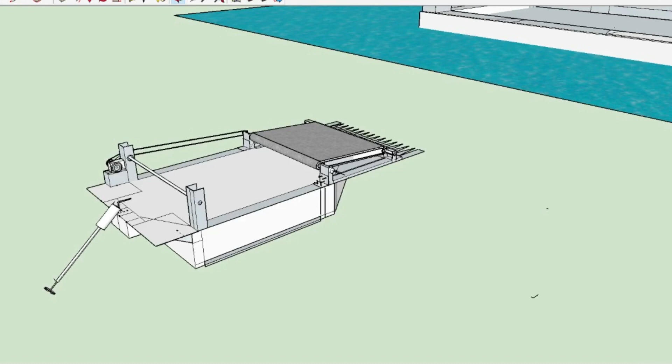As you can see, this is the conceptual design we came up with. This is a machine we can use to clean solid waste floating on the water surface. Also, we can store the waste in the container until it is disposed of properly.

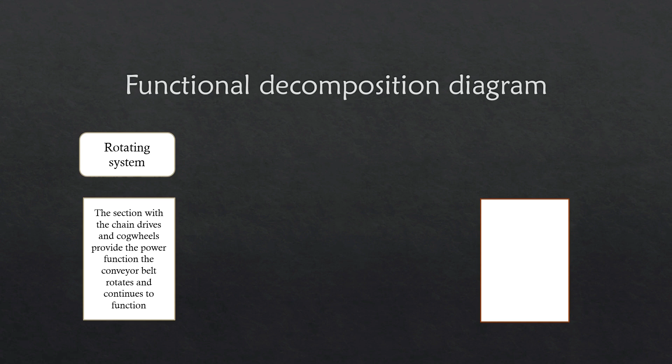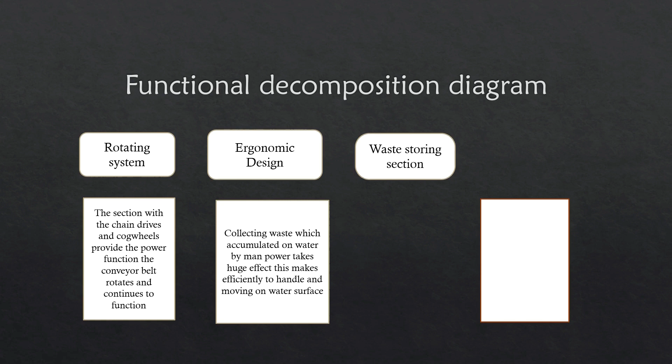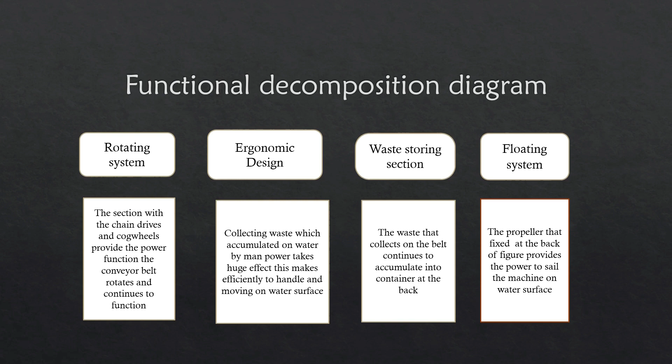Now, let's move on to the functional decomposition diagram. We have a rotating system that helps to transfer the waste, and then we have a waste storing section which will help to store the waste. Also, we have used ergonomic design to be user-friendly and easy to handle. Finally, there is a floating system as well with the propeller at the rear of the machine so that it can sail.

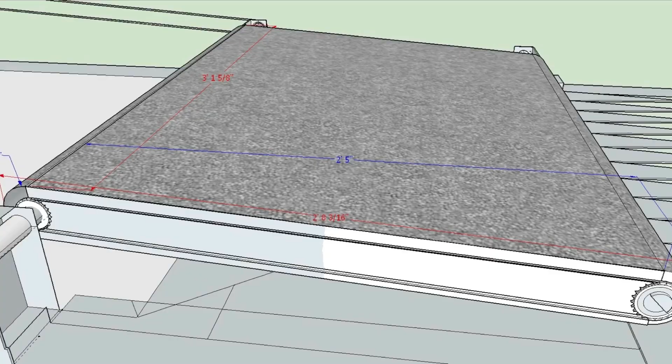Here are some views of our collector: top view, bottom view, side view, conveyor belt, belt functioning area, and container. The volume of the container is 20 cubic decimeters. The collected waste will accumulate in the container.

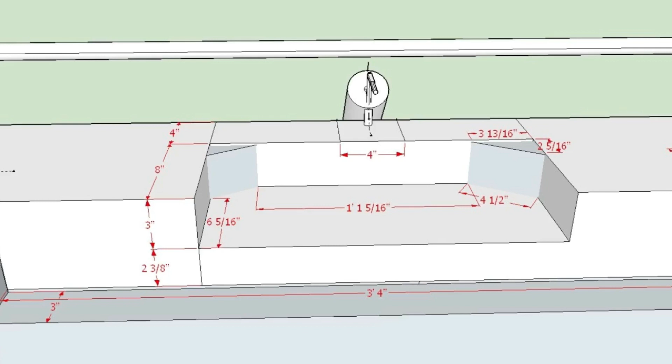Here's the operating area of our collector. A person can move the collector in the direction where garbage has accumulated using the handle provided.

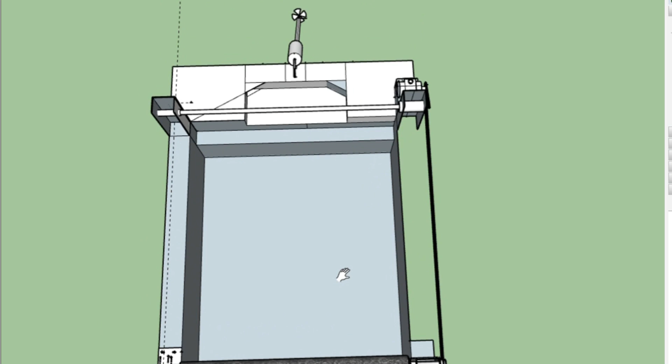Moving into principles applied and energy transfer, we have used a conveyor belt with surface friction which will help to move the waste through the belt. Also, we have used upward thrust to float this machine, and further, Newton's law of motion as well.

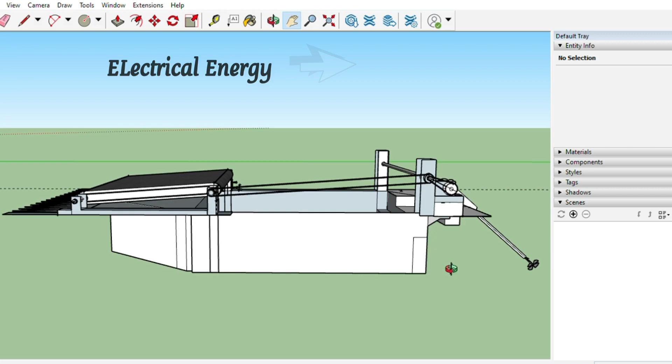When we supply power to the machine, it converts electrical energy to kinetic energy. Electrical motors provide the power to function the conveyor belt. The system, built with chain drives and cogwheels, releases the power absorbed by the motors to function the belt continuously.

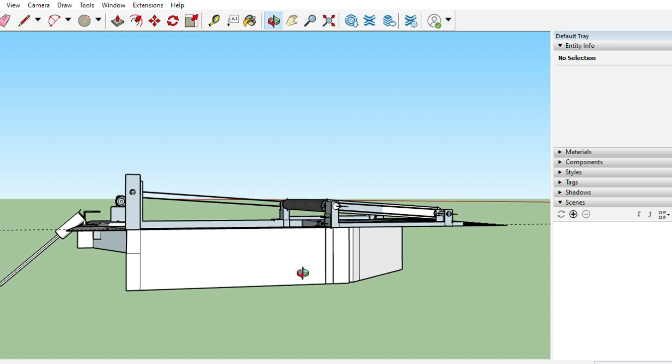The raw materials used are fiberglass, iron bars, cogwheels, electrical motor, power supply unit, and chain drives.

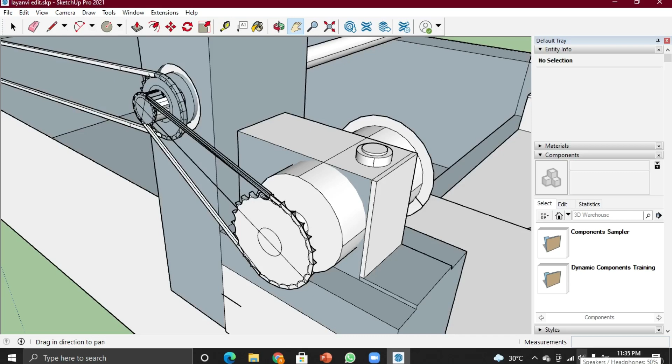There are several ways to stop the device from rusting because it is constantly in the water. The parts exposed to oxygen can be galvanized. Also, for motors we can stop rust by using oil and spraying it onto them. Further, we can put oil on the cogwheels to prevent them from wearing off. Also, parts exposed to air and water can be coated with zinc oxide to prevent corrosion.

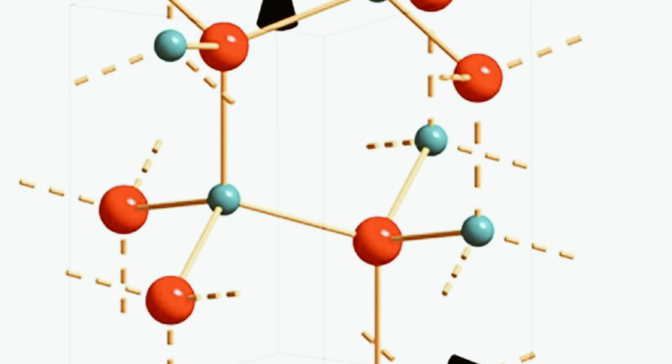People are trying to clean solid waste which is directly added to the water by going on boats and collecting the waste using nets and their hands. Also, we have seen that some organizations hold campaigns to clean polluted areas like canals, beaches and rivers, because most of them are polluted by solid waste. So, it can be cleaned with manpower.

For this, we have come up with a solution to clean solid waste in canals, rivers, and anywhere filled with solid waste and water. As our project, we decided to start cleaning from canals which are filled with solid waste.

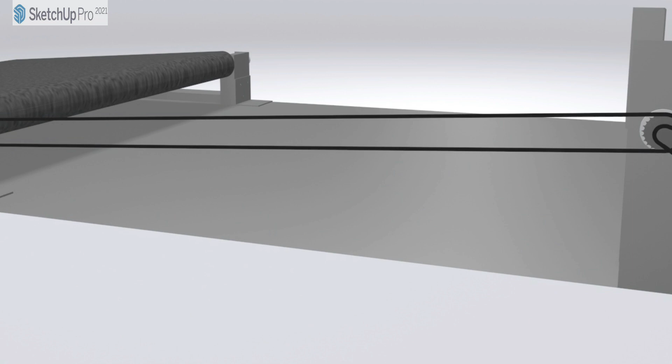As you can see, this is the animated video of our machine. We can clean solid waste faster and more easily using our machine without using manpower. It collects the waste automatically and stores it in the container.

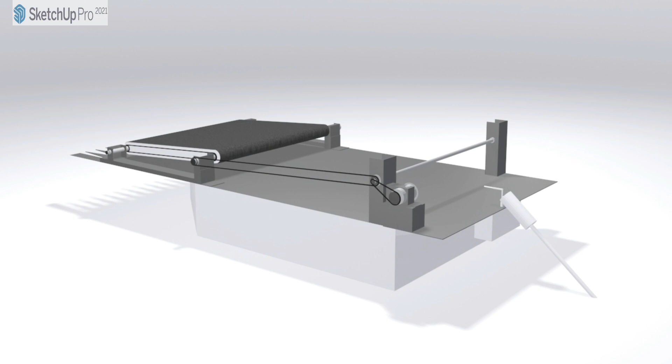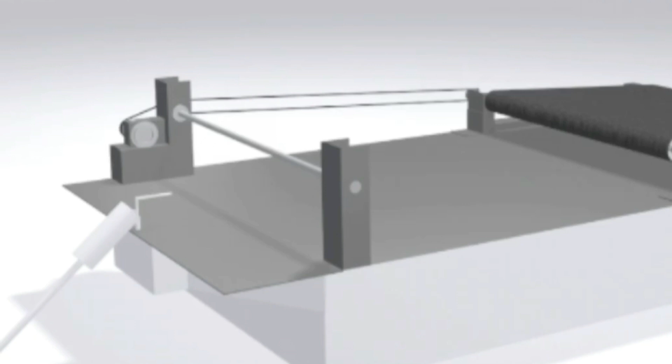In this video, we have not included the container because our purpose here is to show the mechanism of our machine. There are two motors to run the machine through the surface of water and function the belt. The belt continues to function, and the waste collected on the belt continues to transfer and then moves to the container at the back.

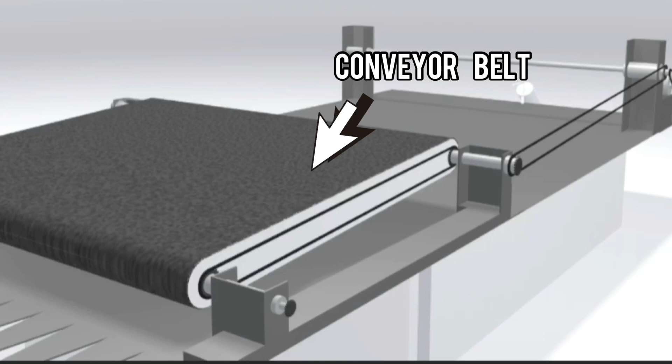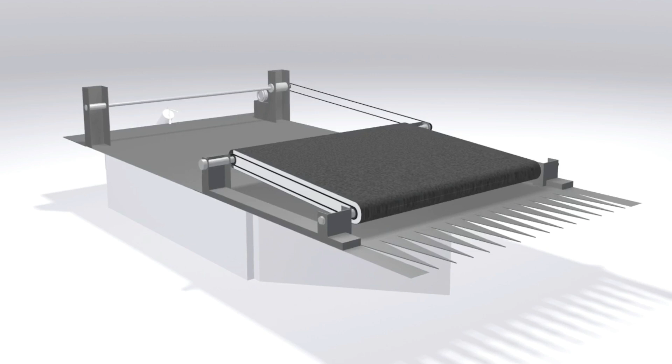Moreover, we have added a blade to the front of this machine to reach the areas easily where the garbage is collected. It separates the garbage from the unwanted mosses and plant varieties which live on the surface of the water, and helps to easily collect the waste onto the belt without any aquatic plants.

Here's a small structure to help you understand how the waste moves on the belt. The waste will accumulate in the container.

Every person on earth needs water to survive. Without it, many of us would get sick and even result in death. Protecting water is important because our existence depends on it. So, action must be taken to save life on earth. That is our main purpose and intention. Let's save water to save millions of lives.